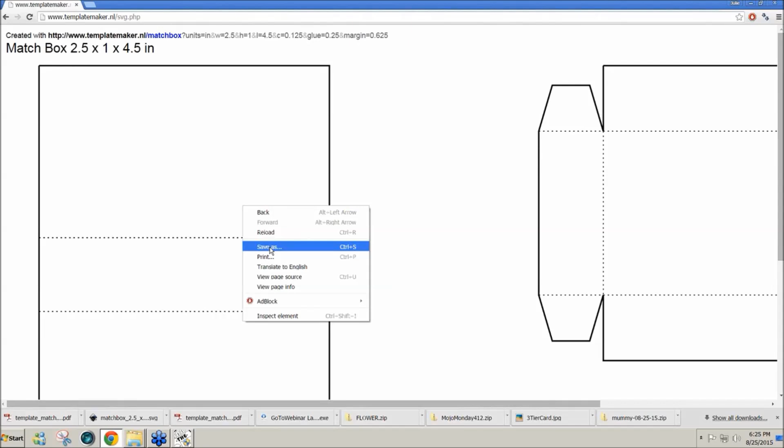I'm going to just save it to my desktop, and I'm going to go back again with the same measurements in the box, 2.5 by 4.5 by 1. I'm going to now download the SVG, and I'll explain why when I get to Make the Cut. I'll click on Create, right click, Save As, and now it'll save as SVG.

Now when we go into Make the Cut, we'll open a new page and show you first how to import the PDF. If I go up here to the top of the screen and click on the PDF icon, then I find the PDF file. It's the template with the measurements here, and click on Open.

Oh, part of the design came in, but the other part didn't. That's because there are two pages. So click on the PDF, click on the file.

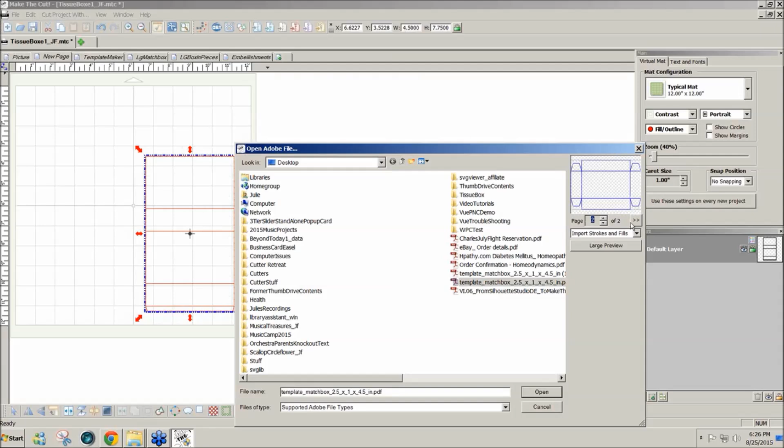Now over here in the preview window, you see page 1 of 2. If I want to bring page 2 in, I've got to click up so that now it says page 2 of 2, and I can click on Open.

Now what I want to do is open another layer, click on the larger of the two green plus icons. I'm going to bring in the SVG. The reason I want the SVG is that when I click on either of these shapes, you notice that...

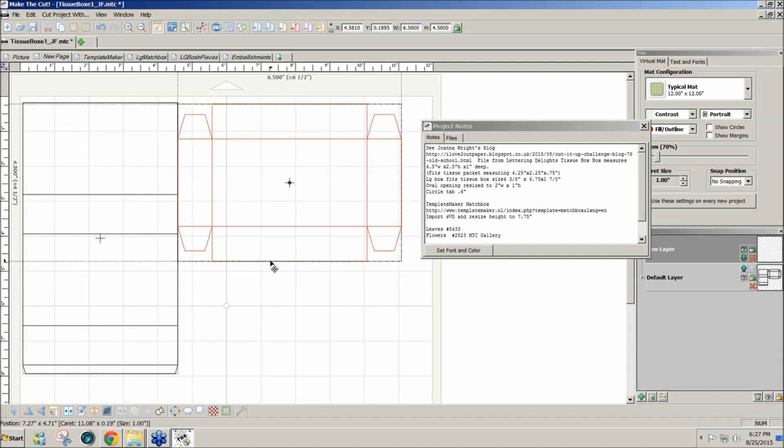...the score lines are all joined with the cut lines. And rather than mess with that and have to break them apart and do all kinds of other things, what I'm going to do is move this down a little bit so I can type T so that they're at the top, and I'll tell you why in a second.

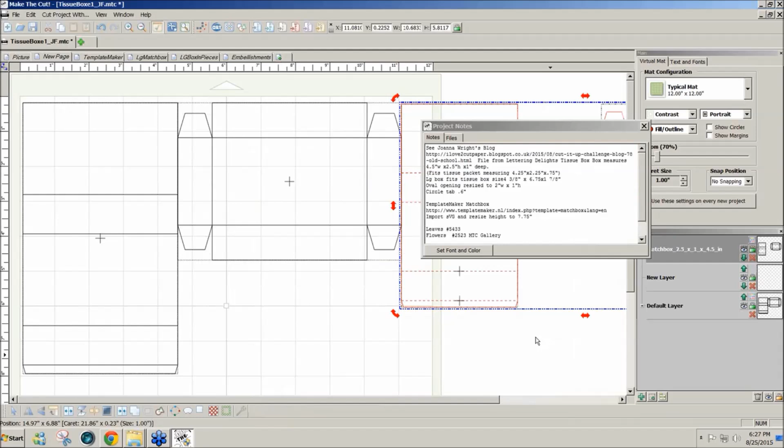But now I want to go get the SVG file. I'm going to click on the SVG import at the top of the page and bring in the SVG file. Now when I hold this over the PDF file, you notice that the size is quite a bit different.

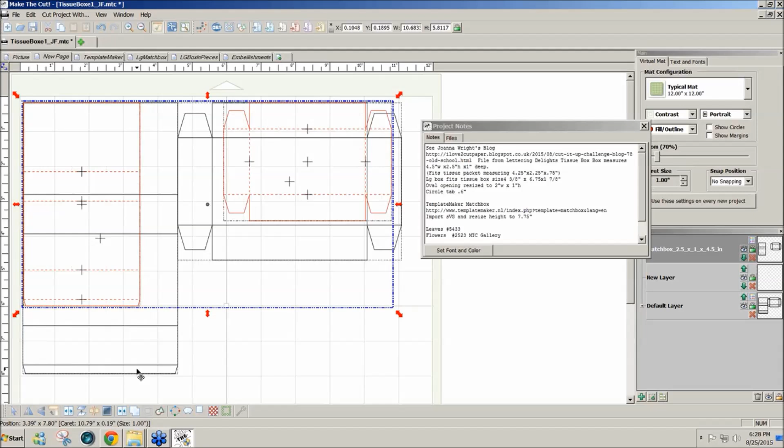It took me a little bit to figure out, I wonder what the real size is supposed to be. Well, this just didn't line up with the proper sizes, so I could either drag it out, or better yet, I'm going to select this PDF, and I see that it's 7 3/4 inches tall, so I'm going to hide the PDF.

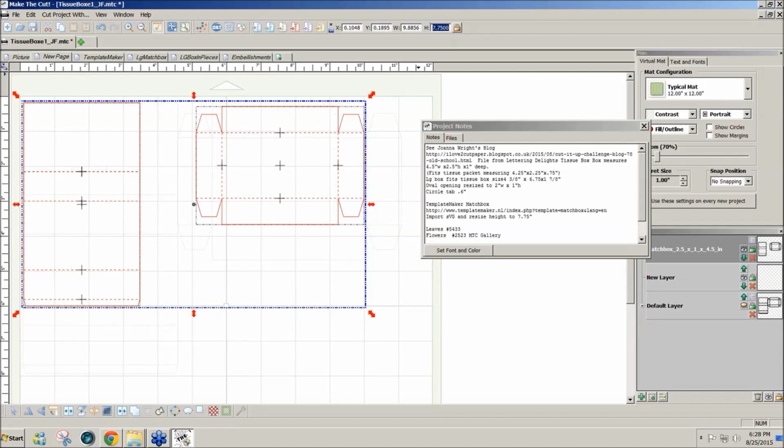Make sure these are lined up at the top, or at least this one is a little lower than the top, because this is the piece that's 7 3/4 inches. I'm going to select both of these, and I'm just going to hold the aspect ratio by clicking on the lock, and I need this to be 7.75, enter. Now it should be the right height.

I can check that and compare, and it looks pretty good here. On the left, they're both lined up. So again, I'm going to hide these.

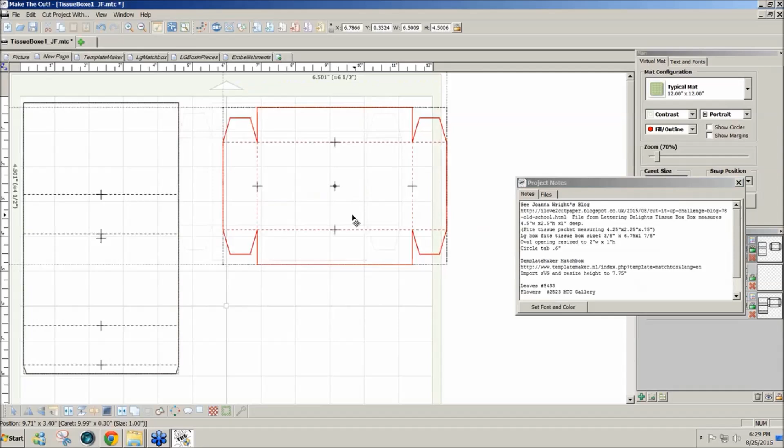Now, why would I want to use the SVG instead of the PDF? Well, the reason is the dashed lines are already in here. They're already on their own layers, so I don't have to worry about them. And that's important to me. Less work, the better.

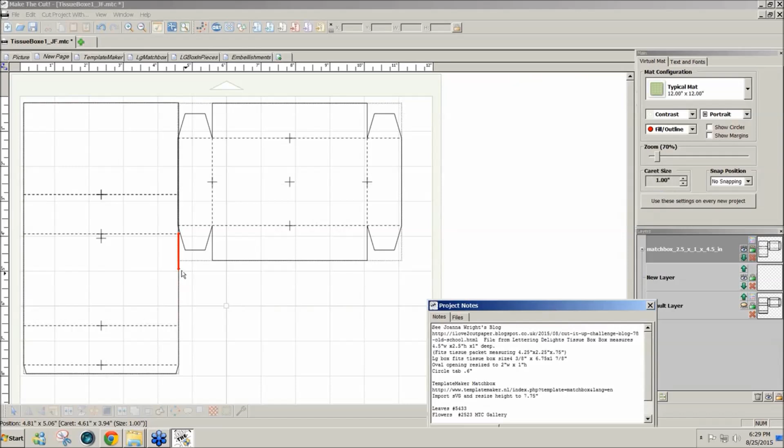So I could use it just like this, but I would like my box to be a little stronger. I'm going to delete the PDF by clicking on the red X on the layer, because I don't need it. It's the one on the bottom that's hidden right now. So I'm going to click on the red X, and it's now gone.

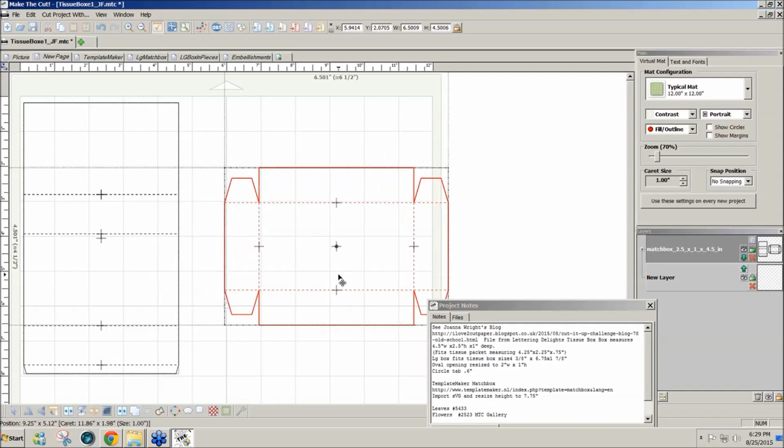I would like stronger sides. So what I'm going to do is add reinforcement to each of the sides before I cut this. To do that, I'm going to add a square, double click, and looking at this, I realize my green mat.

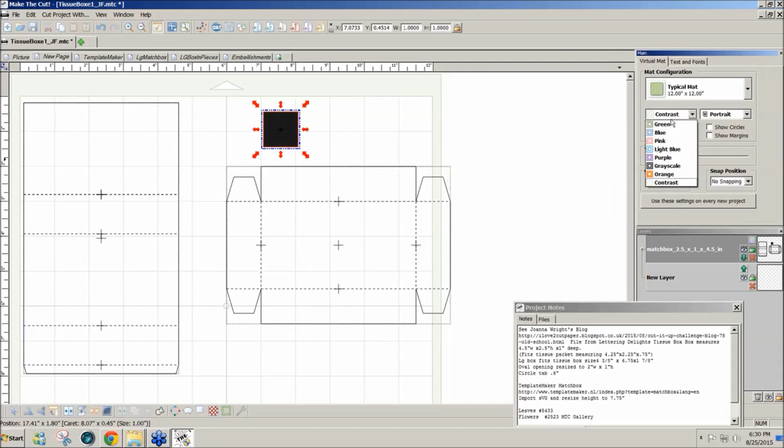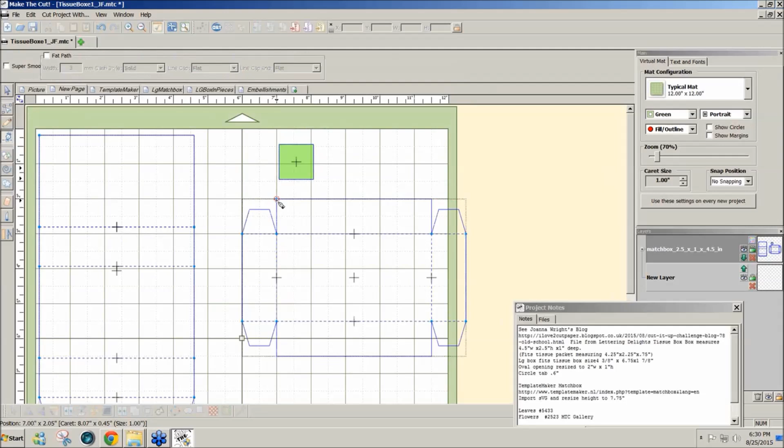Somebody asked a question this week, why does my shape come in with no color? The reason why these came in with no color fill is because there are open paths in these. I'm going to click on the pen and you can see open path up in that corner and up in this corner, and that happens sometimes.

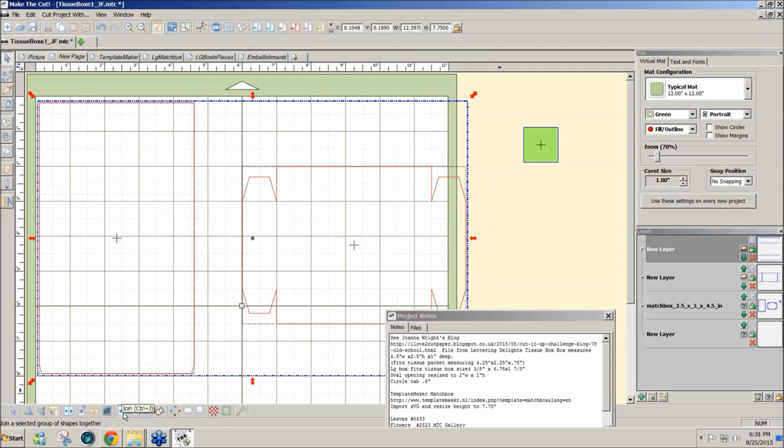So to fix that, I'm going to grab the score lines and send them to their own layers by clicking the smaller of the two green plus icons, because I don't want to do anything to these lines. They're fine the way they are, but I want to take these shapes and join them, and then go to the wrench icon at the bottom and use Fuse and Weld and apply with the slider all the way to the right, and now it's automatically closed the shapes for me, so I don't have to worry about open paths, and I can see what I'm doing here.

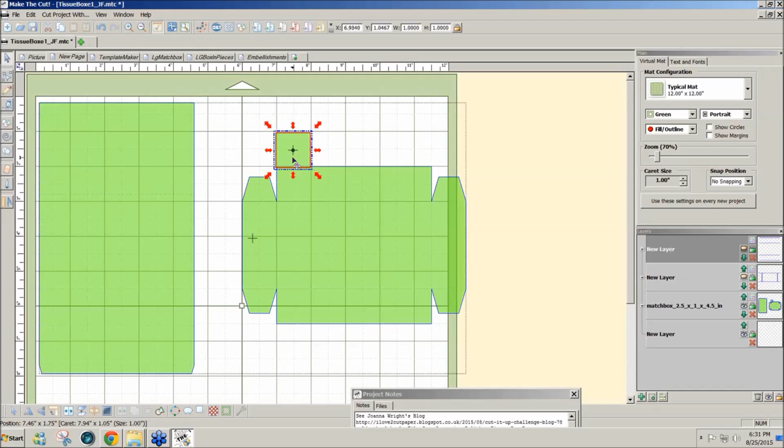So I can now add my extra pieces here. I'm going to overlap just a little. My square came in at 1 inch, which is fine, and I'm just going to drag it out so that it lines up with this edge here. I'm going to hold Control and Shift and drag, and again just barely overlap...

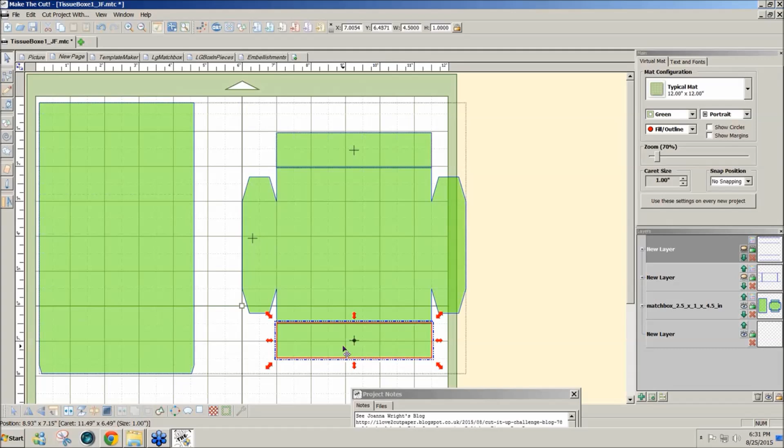...with this square here. I'm going to hold Control Shift and drag again and rotate 90 degrees and line this up so it's just overlapping a little. Shorten it and line it up with the length there. Hold Control Shift and drag...

...and line that up. I do want these two pieces to align to the top, so just type a T. I'd like to line up these two pieces with a V, vertically aligned. That would be good. And now I want to go to my score line layer. The highlighted layer is the one that's showing here.

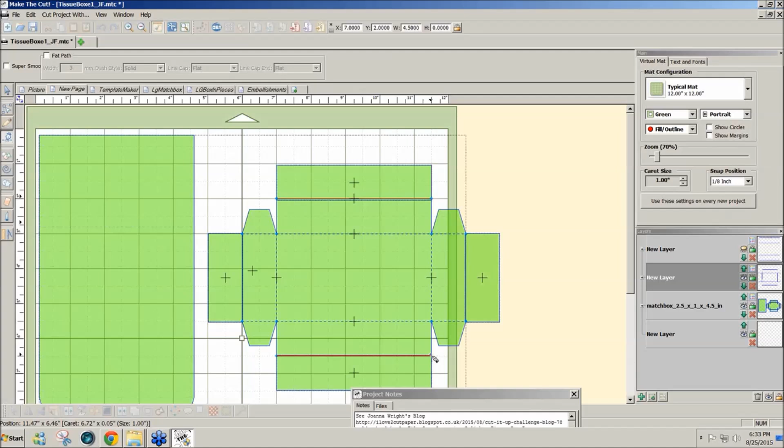I'm going to add a score line right above there. I'll click on the Bezier draw tool, turn snapping on, then left click, right click, left click, right click, left click, right click, left click, right click.

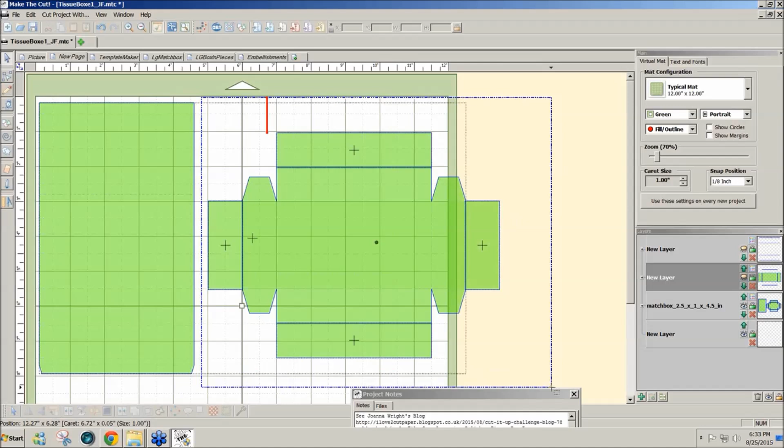Now I'm going to hide the score layer, grab all these pieces, and click on Weld. They should weld if they're overlapping.

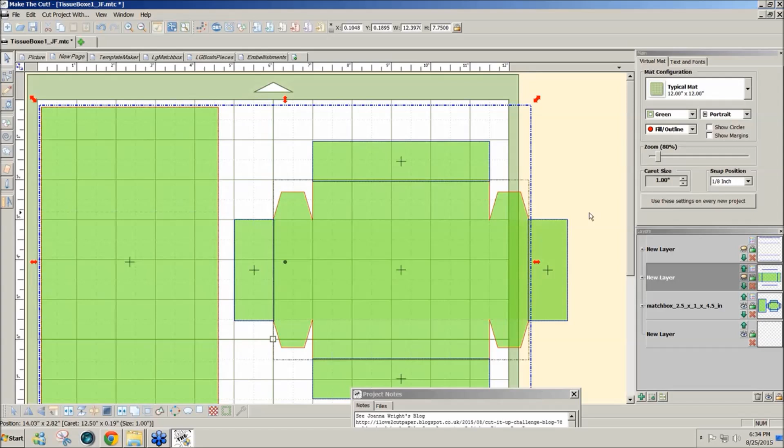I think these are joined, so I'm going to split them. There they go. Now I can show the score lines, and I have a nice box that's ready to fold up.

Now these flaps here, I'm going to make sure that they're all scored. Select line style, adjust the lengths a little bit. So these are all ready to go.

And I need to pull a little drawer. If you remember, my drawer has a little notch so I can open this to put my little pieces in there. To make that, I'll add a new layer and go to Basic Shapes, type in CI for a circle, double click on the circle.

I really only need this to be a half inch, I think. So I'll just type in 0.5, enter.

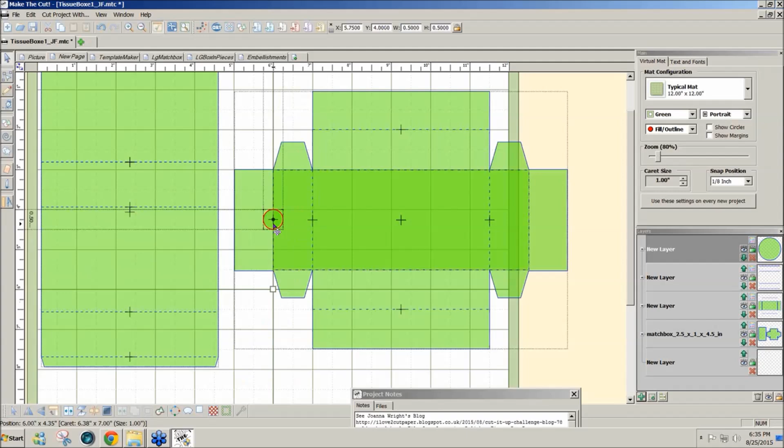I would like it to be on this fold line. I'll turn off this snapping. I'm going to hold the shift key, select the box, and type H to align them horizontally. Again, I'll hide these score lines, and with both of those selected, I'll join. Now I've got a circle here, so when this folds over, I'll have that little notch.

The only other part that I need — this shape forms the bottom of the box, and this one wraps around the outside. So these are the sides, and it's just a box where you set the tissues inside. You fold the tabs, glue it, and then tuck over all the extra little pieces to reinforce the sides. This one, you put your adhesive here and wrap it around, and it'll slide right over the box. So what I need here is the opening for the tissues to come out.

So I'll add a new layer and go up to Basic Shapes. This time I need an oval, so I'll type OV, double click the oval, and rotate it 90 degrees. The oval needs to be 2 inches by 1 inch, so I'll make that 2 inches wide by 1 inch tall, and enter.

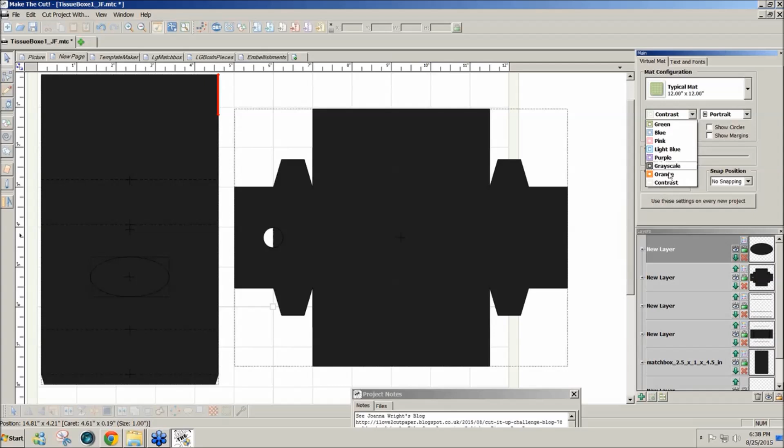So coming back to the green mat, I'm going to select that oval, Control Shift and drag, and send it to its own layer. Now I can select this and join it so I have my opening, but I'm going to make this a frame by clicking on the shadow layer, and you can use the thickness you want. I used 2/10 and accepted, and then if you select both and join, you have a frame that'll perfectly fit around your opening, and then you can add your other embellishments as you like.

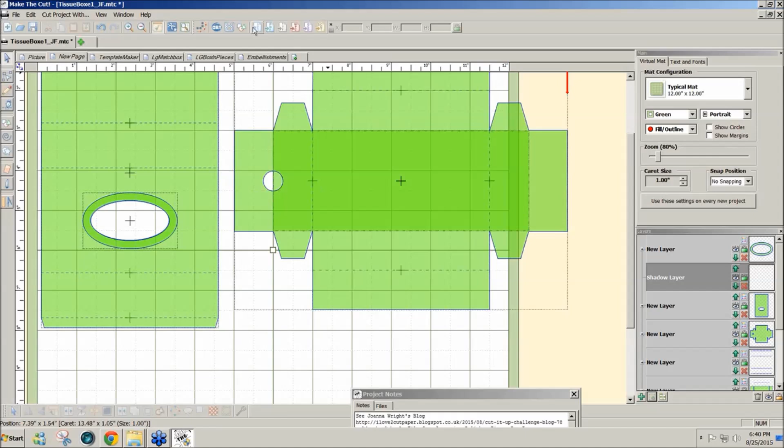Now this particular piece of the design didn't weld or join with this piece, but if I do that, I think I just need another. I'll break this apart and duplicate this, and join. Then I will select the other piece, and join.

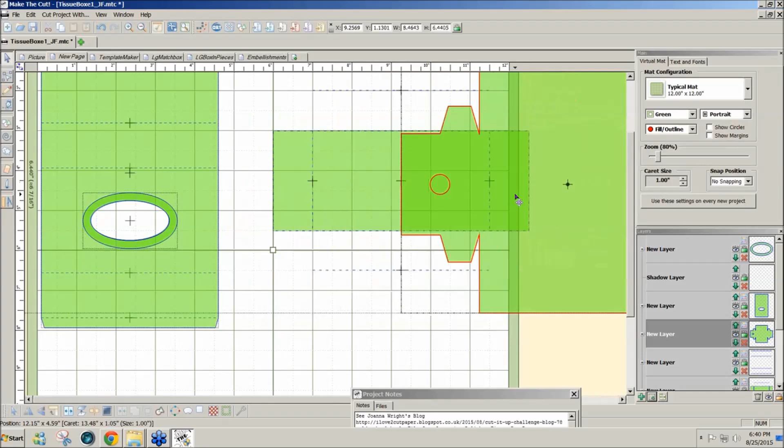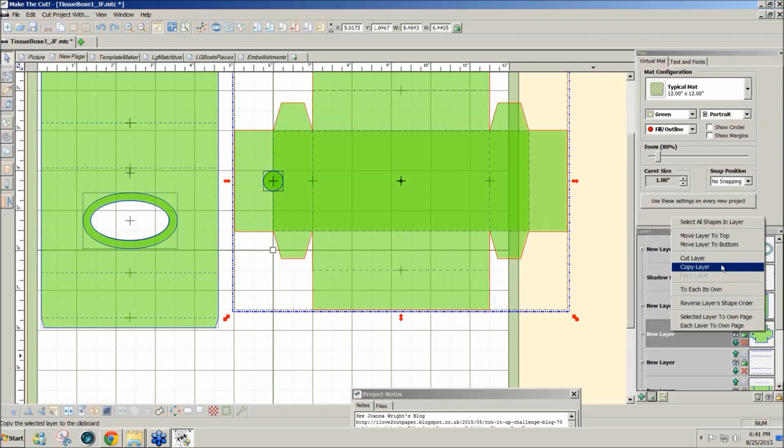So I have two holes here. I want one hole to join to this underside piece. If I move this to the bottom, then I can grab this piece right here and this hole, holding the shift, and join.

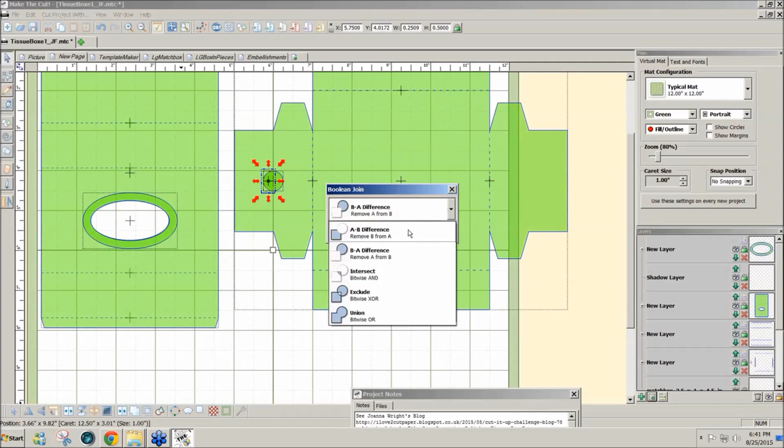Boolean join. I want to remove that hole. Now I want to get this hole and join. I got rid of that little piece there.

Okay, so any questions? I put everybody to sleep, right? Nope, sorry, I forgot to unmute. No questions.

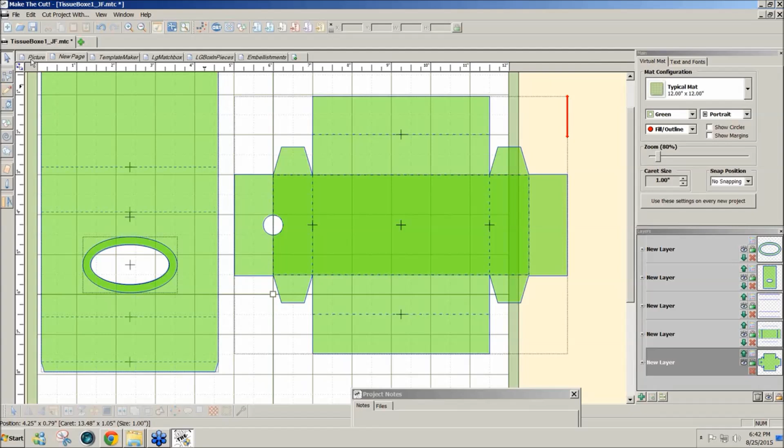Okay, well, I'll show you the picture again. You can decorate the box as you like. I love it as a get well gift. I didn't show you the large box.

I actually resized this and found out that the box that I have in this picture is actually a bigger box. It's not the pocket version of tissues.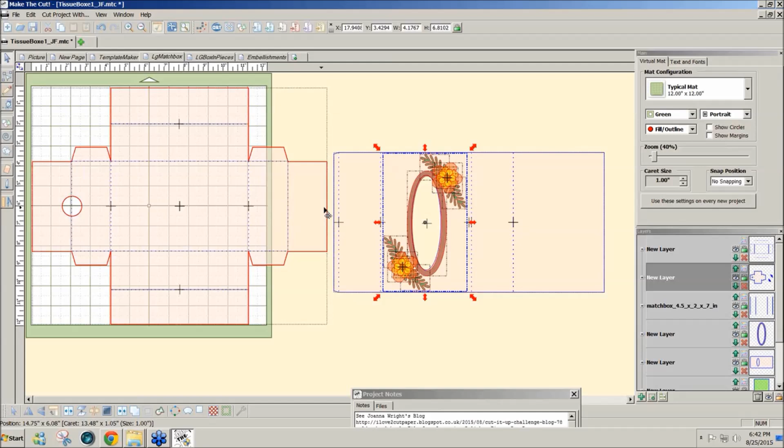It's exactly the same process, but I typed in the measurements to be bigger. But you notice it hangs over the 12-inch mat, and I only had 12-inch paper. Both these pieces are too big.

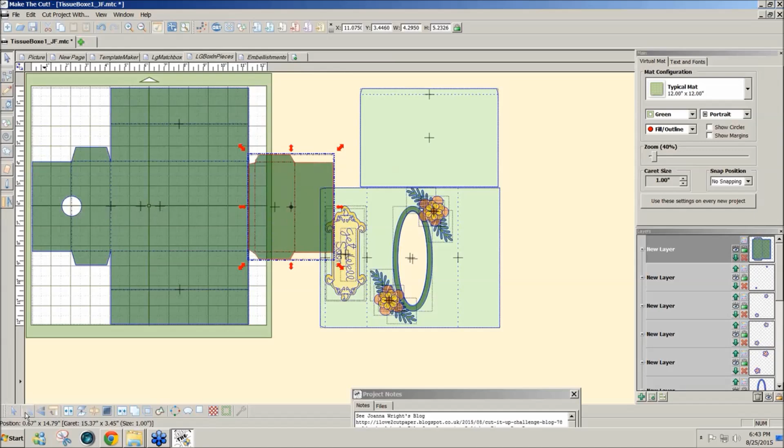So then I decided, well, I have to break it apart. So I took this edge off of here. Cut that off. Actually, it was this way. And I add a little tab here, so this could be glued on.

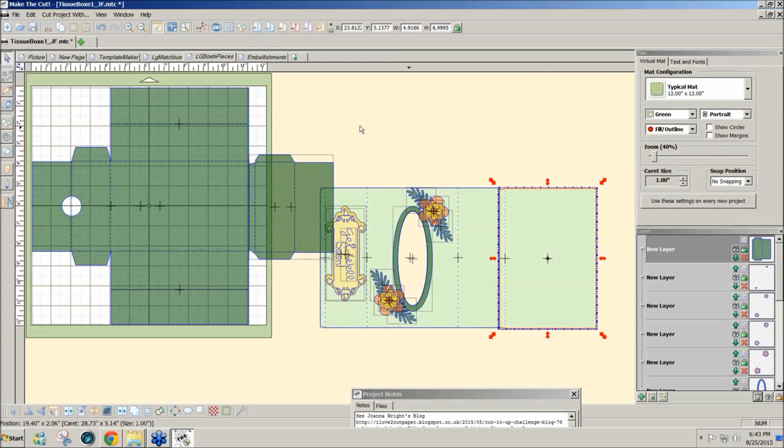And I took this edge off the end and added a little tab so that it would glue here and be the equivalent of the large box here. And then I just added the embellishments.

So whether you want a bigger box, now this isn't the huge tissue box, this is just more of a personal size, but it's not the pocket size either. So you can make it any size using the template maker, which is free online.

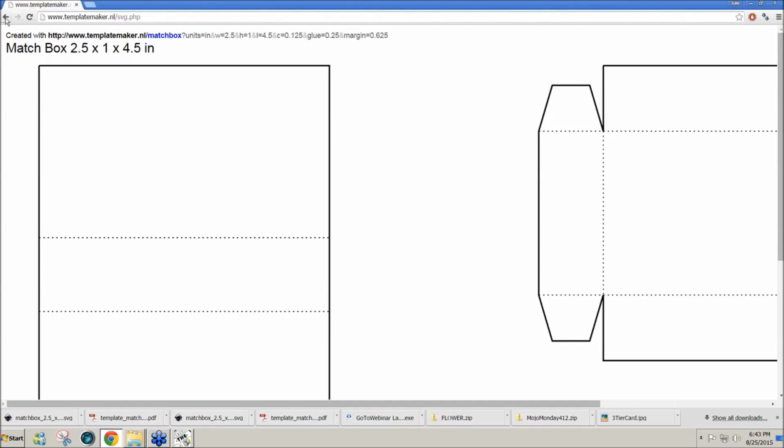And so whenever I want a custom box, I check here first. See if maybe they have what I'm looking for amongst their collection. A lot of fun things in there, and no need to reinvent the same box over and over again.

So that's all I have.

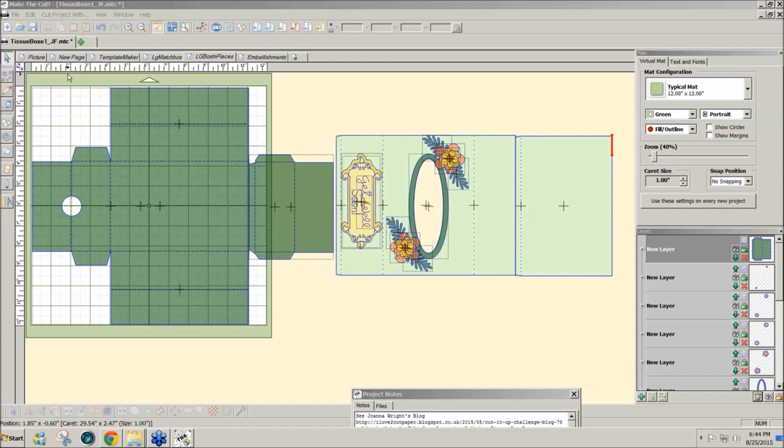Fuse and weld. Yeah, fuse and weld is for when you have... Go ahead, Julie. I use fuse and weld any time that a design comes in and it's not filled. Sometimes it's because you have two of the same thing that came in and they're stacked. For example, I'll bring in that SVG file again so you can see.

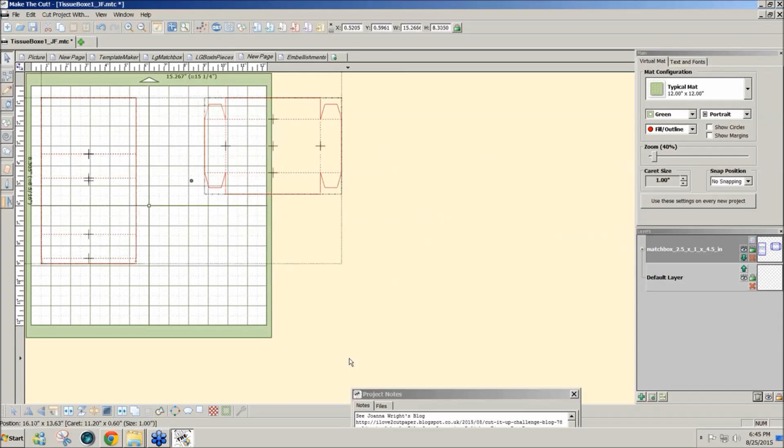So if it has an open path like these pieces do, there's not going to be any color in them, so you know there's an open path. Now to check, you just click either on the pencil or on the pen, and if you see a dot there, now these are open paths because they're score lines, but there shouldn't be an open path on the edge.

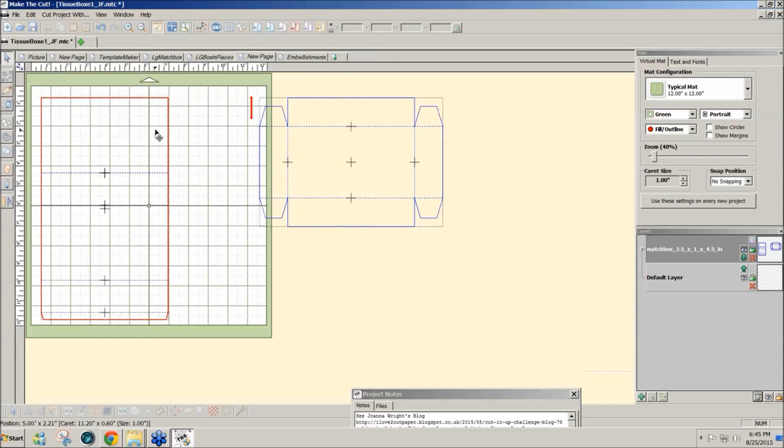And the quick way to fix that is, first of all, you have to join, because fuse and weld will not work if the shapes are not joined. So I've got them joined now, and now you click on the wrench and fuse and weld.

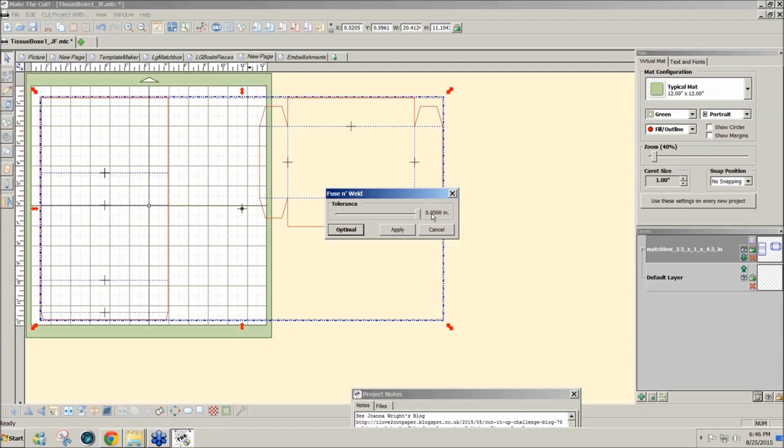And if the design is within 5/100ths of an inch, if each of the edges, like this line and this line, if they're close enough but just not quite meeting, and they're within the 5/100th inch range, then it will automatically join them. And you know they're joined because now they get filled with the green.

The other time that they can be needing Fuse n' Weld is if you somehow got a double shape. I'm going to hold Control Shift and click, and sometimes if you had two of these and join, let's see if I can select them both. I'll put one on its own layer.

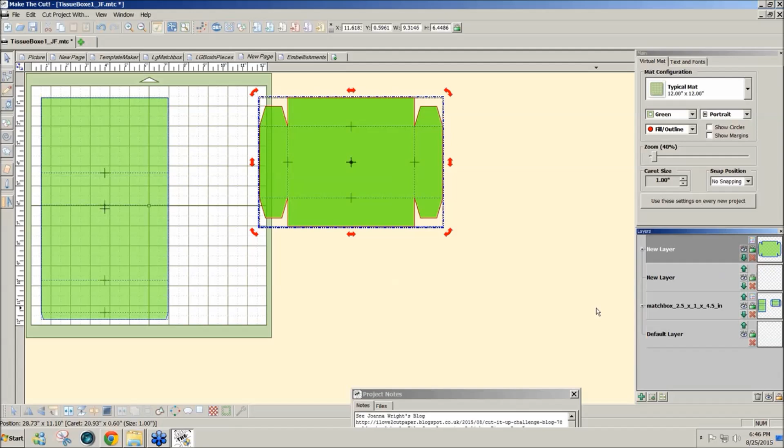And send that to its own layer. So I'm going to select these, and if I join these, you notice that it turns clear again. That's because they're double lines. And if you get double lines, you could either try getting rid of them, or you can do Fuse n' Weld, and you should get your solid back again.

So either there's an open path or you've joined two of the exact same shape. I hope that explains it.